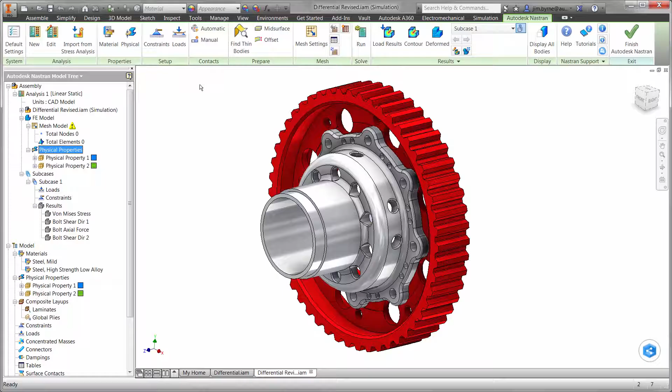Remember, this is a mass-produced assembly. We can save money by reducing the number of fasteners. Let's make the change, and also take a minute to see how this study is set up. First, we will reduce the number of bolts from 12 down to 8. Then the setup for the analysis is simple. We will constrain the center of the hub, which prevents it from moving. Then apply a total force to the teeth on the gear of 5,000 newtons.

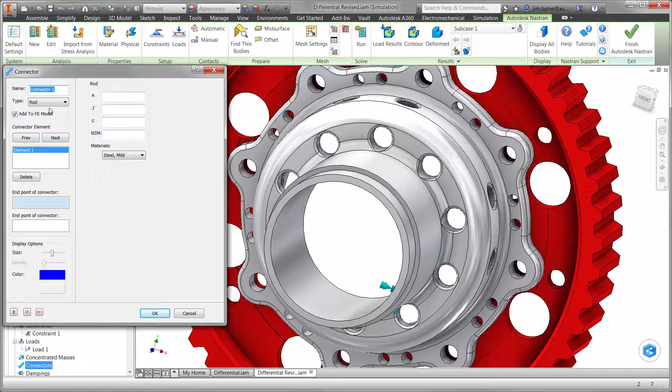Next, we have the bolt connectors. There are two options when analyzing designs that have fasteners. First, the 3D models can be left in the study and they will be meshed as solid elements like the hub and the gear. This option involves a lot of work setting up proper contact conditions as well as lengthy solve times. The second option is the use of connectors. They take less time to set up and solve several times faster than solid bodies.

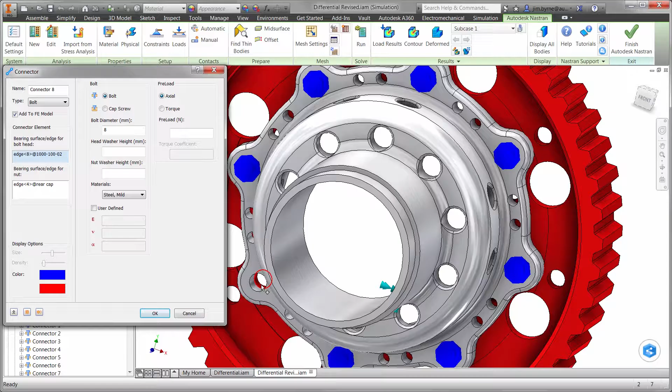As you saw earlier in the video, they also provide results like axial and shear forces on the bolt, and that is exactly what we need to know. Notice the results take into account the material and preload, providing the information we need to make informed design decisions. Now let's generate the mesh and run the solver.

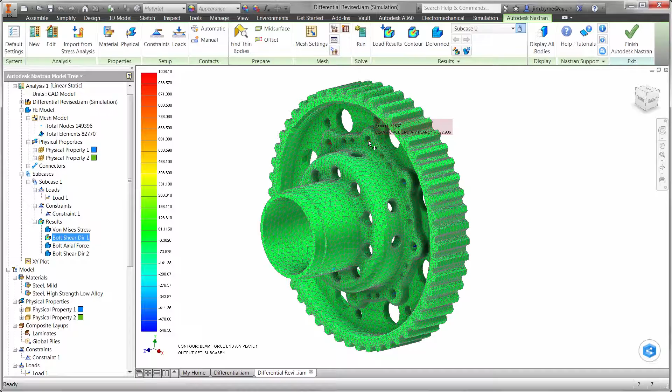Just like the previous design, we will begin with the axial force on the bolts. It looks like the worst case is slightly higher than the 12-bolt design at 73 newtons. Nothing to be concerned with there. How about shear? In direction 1, we have 322 newtons. And in direction 2, we have 1,588 newtons. Now is the moment of truth. Will the 8 bolts be sufficient for this design?

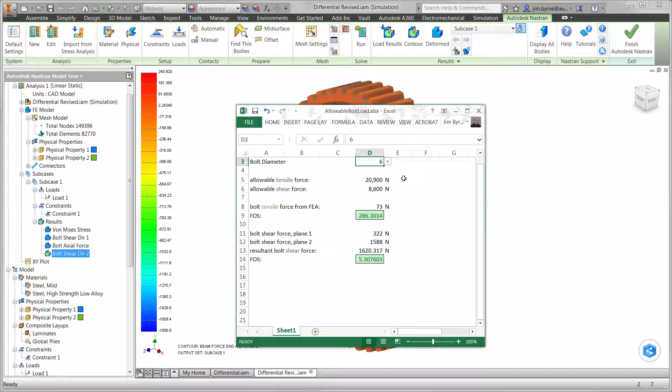The results show the 8-bolt configuration is going to be enough. What about the size? Let's try 6 millimeters. We may even be able to save on size as well with a factor of safety above 5. As you have seen, we are able to run quick what-if scenarios to find the best design possible for the differential, all before a single prototype is built and tested.